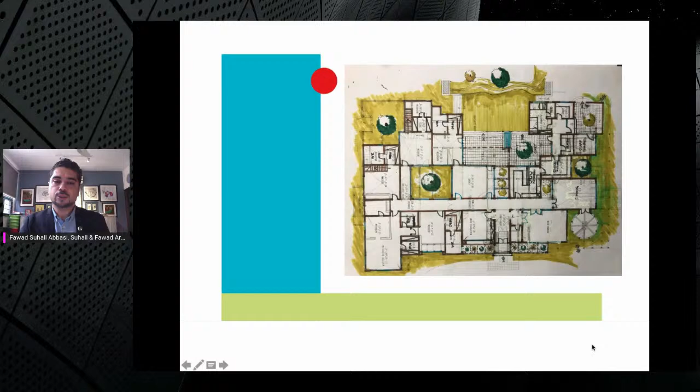So there is absolutely no way that you leave that to your subordinate or your engineering associate. Every aspect of your design has to be dealt with yourself as the lead architect, the lead consultant on the project. The elements of design for us are almost always inside out, because we feel these connections are crucial to our philosophy.

Whereas layouts are established with 3D visual studies. Once the space program is formulated, many ideations are done simultaneously to study and form the building type. It could be a house for a smaller family, or it could be a large farmhouse for lots of people, or maybe very limited people.

But then these aspects are always discussed with the clients. They're given knowledge of what really needs to be done, because at times you meet people who always want more, so we educate them in the process—really, the spaces and their importance are crucial to the design of your building. Since post COVID, we've been able to really convince our clients that they need to work on smaller buildings and work on the landscape part of it, so that you can be outdoors more than indoors.

Or if you're indoors, you're in the outdoors. As you continue to learn, we also seek to establish a careful, emotional, interactive use of light and color in a very subtle manner. We are also always looking for solutions that can satisfy the aesthetic feeling and well-being of the people.

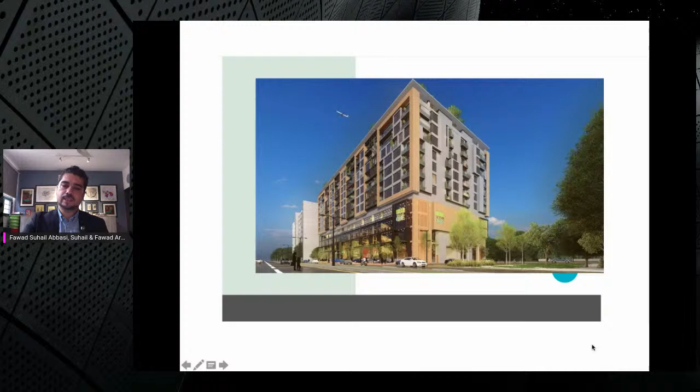Brick and fairface concrete, one of our favorite materials, like I've said earlier. We've used that, and again bringing in natural light and artificial light both as an element of design, which became a signature whenever we design a building now.

Our office is based on not just the matter of architectonics or something mechanical. We've always looked at a building as an art form.

The identity of the office in the last few years has become about really experimenting with materials, brick being the favorite, because of how brick would complement other materials, being something more lasting. It ages very beautifully, very gracefully, and we always try to reflect our philosophy in whatever we create.

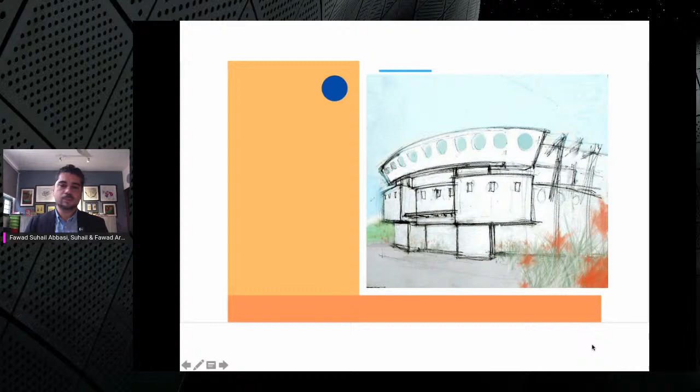It's important for our studio to start a project once we've specified our materials, rather than saying we'll think about it later. No, every time we design a building, we've always tried to make sure we specify the materials.

Many times the clients that come, I would say about 65-70% of people who come to our office, come for buildings in brick because that's our design style. But even if we are looking at a client's pigmented plaster building, maybe with brick or without, we do specify our desire to really understand it first before starting building design.

For us, it's like putting together a piece of Lego, blocks that we juxtapose by leaving multiple vacuums as breathing corridors, like subtracting from a series of blocks. This leads to private, secure, unobstructed views from every room. It also helps achieve good airflow systems due to self-created voids as a natural transition.

That's how it is. We do intend, and always intentionally look at building types as an art form.

This particular building, the Polo Complex, which we were recognized for, received an honorable mention a couple of years ago, is a rather large project. We were able to convince our client to really work with brick as a permanent material.

What that did is there's absolutely no need for any paintwork later or anything else, and it's really grown out of the green areas around it that we've developed.

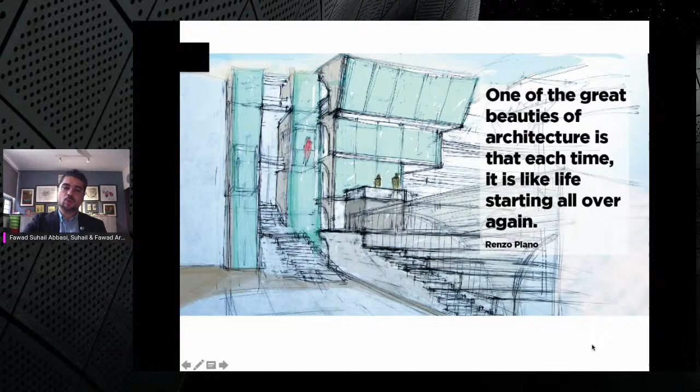I really like this amazing line by Renzo Piano: 'One of the great beauties of architecture is that each time it is like life starting all over again.' It's so beautifully said. If you look at a sketch we did for a project a couple of years ago, we can't put away design and deal with it later - color and materials will always be dealt with together as one whole. If you look at a building type, the materials are always necessary and specifically designed for it, coming up with forms and ideas close to what most clients want. They come to us because they want to look at permanent materials.

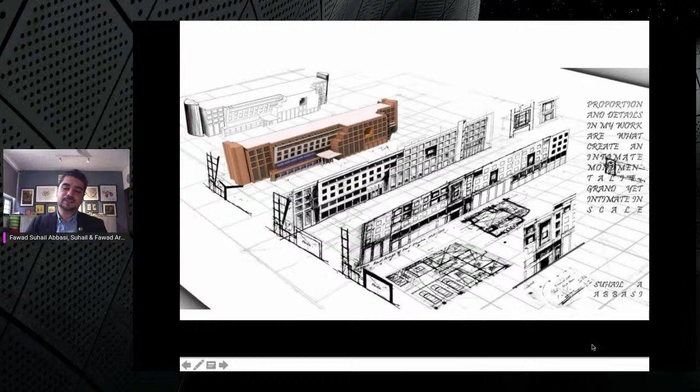This is an important sketch I'd like to share, by my father, from when we were working together on a hospitality building a few years ago. Proportion and details in my work are what create an intimate monumentality, grand yet intimate in scale. We were looking at the transition of the plan and its development, and by the end we did a brick building with fair-face concrete. At times we feel like hotshot designers out of school and forget to experiment, but someone like my father, out of school over 50 years, still believes there's no ending to learning. We all need to understand that these transitions and phases are very important to our design.

The concept is always simple and straightforward, and we can focus on the transition between indoor and outdoor, creating multiple introverted landscapes. It's something so apt and appropriate to the different elements that we as architects often don't realize. As architects, we have multiple tasks and an endless varying range of formal challenges we have to find solutions to. There are many - we have to first look at designing. Do we ever get a chance to sit and only think about design? Never.

Then we have to think of the new projects that we need to bring in to run the office. We need to look at deliverables, the processes in producing the number of drawings required to be submitted initially for approvals, and then of course the working drawings and construction drawings. So there's so many different elements that we need to look at.

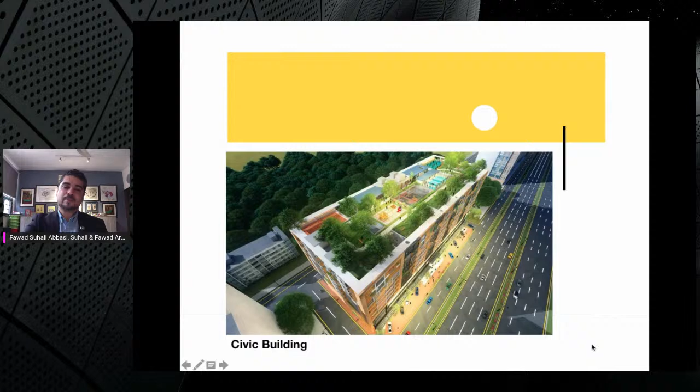This sketch that I'm showing you is for an under-construction building, the one I talked about earlier. The 10th floor of this mid-rise building is a sky park at the top, and it's definitely something I'm looking forward to enjoying in the next couple of years when this area will be developed. From day one, this building was designed with the sky park in mind, and with time it's improving.

Whenever I go back to the site, I enjoy how the building has transformed to where it is now. Like I said, it is a brick and fair-face building with major elements of landscape, texture, and color. As we go along, we look at all these elements and try to show that there is never an ending to really studying the materials and how they weather with time.

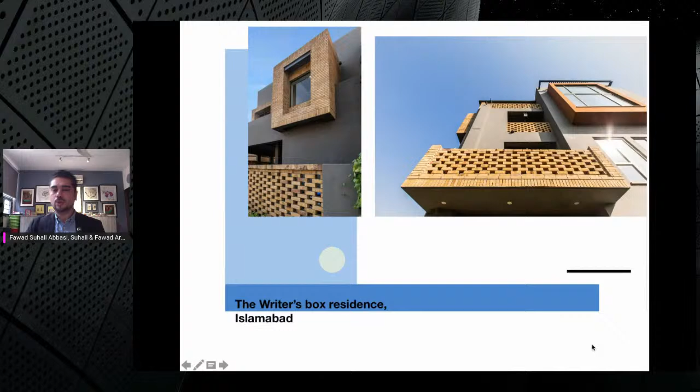I think on a daily basis, whenever we're doing a new building, this exposure to the available materials and the history behind these traditional elements has actually been really important to how we now look at architectural design in our studio. So one more view is that architecture has a subtle but huge influence on the community.

You may not live in that building, but as you pass it, you will invariably be affected by its presence, which influences you regardless of whether or not you are aware of it. This is so true—you always notice something that is apart from anything average. I won't know if average is the right word, but you always notice something good. It could not just be a building, it could be anything out of the ordinary. It stands out, so a good piece of architecture is always important and always leaves a mark on you.

Design is a blend of respect and negotiation for the aesthetics and ideas that can make each project, and I completely agree with this quote—that's how we work around it.

So color is evident in our work not only in terms of walls, we try to bring in color through skylights. This particular skylight you see on the right is an element where we feel the blue and the yellow of the light it brings in really creates a natural color tone on the walls.

As the sun direction changes every few hours, it changes the quality of light within that building. On the left, as you see, we feel that brick as a permanent material can really change the quality of the permanency that you see on a building.

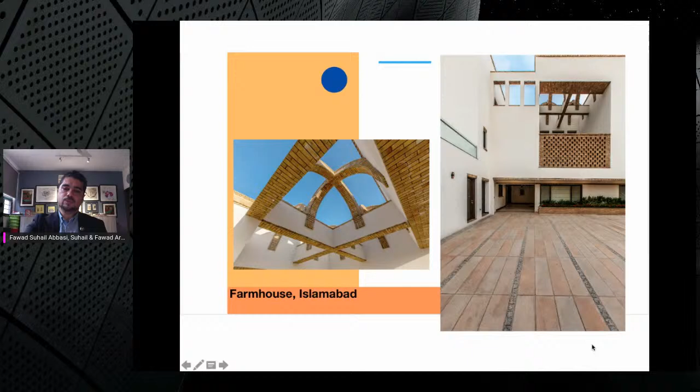Again, in the courtyard, showing how the water wall and the entrance relate to the entrance balcony, looking out to the basement courtyard, and how each room—maybe a living room or the bedrooms—looks into it without anybody really looking inside that space. It's a very private space.

Every time we design a building, and the requirements come through our clients, we try to address every single element of it, keeping our philosophy in check, and that has been successful in many areas. Again, like I said, it's a learning curve, a learning element, and we tend to learn from each project that we do.

The interior manifests complete admiration of natural materials, geometrical patterns, and styles that define various spaces and are attributed across various interior and exterior spaces. I think this courtyard, wherever it's placed, even if it's an inward-looking or outward-looking courtyard, the treatments, the use of color, the use of a palette that complements the exterior materials, and the furniture used always has to work together.

It can never be designed independently; it has to be seen as one. The use of these courtyards, what they're looking at, the landscape around them, the use of color—everything blends together once you design it in totality. How the flow comes along, how the brick jali would react, how the trellis spaces create shadows—each detail needs to be looked at independently, but then brought together as a large space.

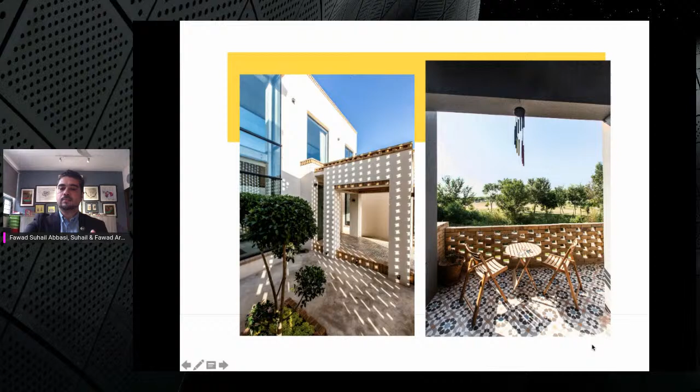Every time we do this building type, we first study and look at where the building is going to be placed. At times we create a natural courtyard, or we get a view on the outside and open terraces and balconies traditionally so they can be enjoyed even more. Then the use of patterned tiles or natural materials enhances it. The permanency of brick jali as a railing, a detail, a skylight, or a facade all become naturally part of the design and the building type.

I think a very important quote I made part of my presentation: no person who is not a great sculptor or painter can be an architect. If he is not a sculptor or painter, he can only be a builder. For an architect, I think so many disciplines come together.

If I remember correctly, and I'm sure this goes for every school around the world, we're given a fast-track idea in our first year of college of how to build, how to paint, how to work with elements in sculpture, how to do printmaking or fine arts. So we've been given a flavor of all of that, and that's the complete package of an architect. If that isn't there, I don't think you can call yourself an architect, because it's something born within. Even if you want to do good buildings, you need a taste of everything that comes along.

Just showing you how we relate the office or a restaurant and how we bring in color through that. Landscape and water is crucial to our design, and this is something we truly celebrate every time we do a building.

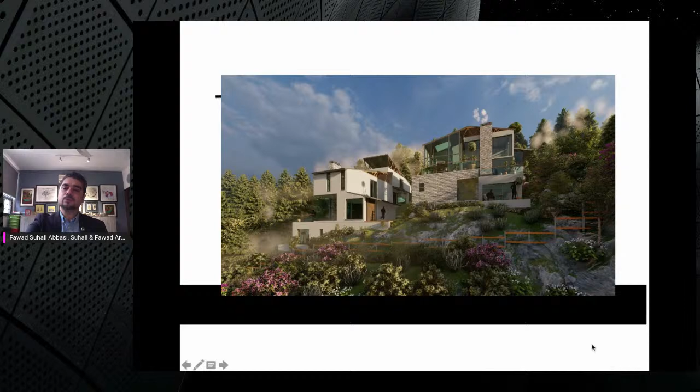Our buildings are humble on many levels: formal, functional, social, technical, and so on. We make a conscious effort to address these objectives in terms of access, pragmatic relationships, and wider climatic and contextual factors. At the end, I thought I'd share a sketch of ours.

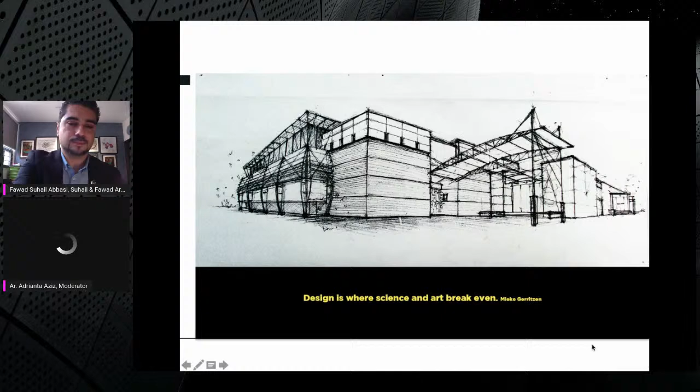It's such a beautiful storyline, and every great design you share with us begins with an even better storyline. The way you portray design and art should be born from the selection of materials and color. For me, color is a power which directly influences the soul. Even the materials shape your idea. I think that's talking about the ending part, when you say art should be born from the materials and colors itself.

When we were growing up, and especially when I became part of a beautiful fraternity of architects, I was able to meet such amazing people that I never thought I could. Each architect, each new friend has taught us something, and I think context is very important to any architect. If you do not celebrate your history and traditions, I don't think there's ever going to be a country's architecture that you can celebrate. So it's very important to really go back to your roots once and for all, look at what best you can learn from, pick up from, and then of course improve yourself as you go along.

I've been to your house, your parents' house. Remember, my visits were back 2, 3, 4 years ago, and then you showed me one of the ceilings made by bricks. It was amazing.